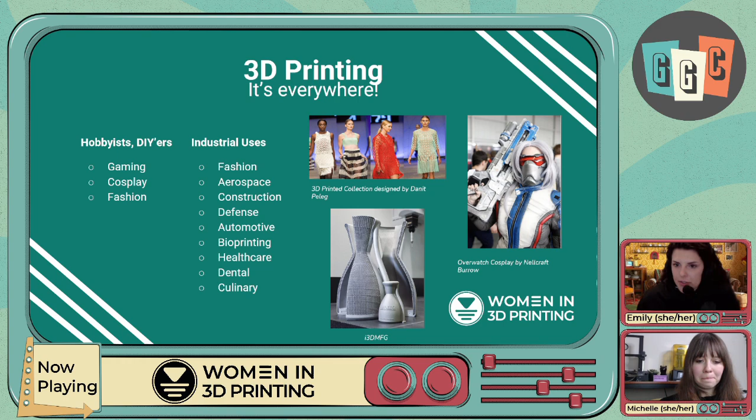On the slides here, I just have some cool pictures. On the far right, we have an Overwatch cosplay outfit that was 3D printed, the mask and the weapon, and then an example of some 3D printed fashion. And of course, the bottom picture is an example of some metallic additive 3D printing that we will get into a little bit later. Next slide, please.

I just wanted to do a brief introduction. If you want to learn more about 3D printing or see somebody local and how they implement and utilize it, check out Joel Telling with 3D Printing Nerd on YouTube. I highly suggest you follow him. He's a great resource to watch and see just what the technology is capable of.

If you want to play the video, I got a fun little snippet with Felicia Day after this commercial break.

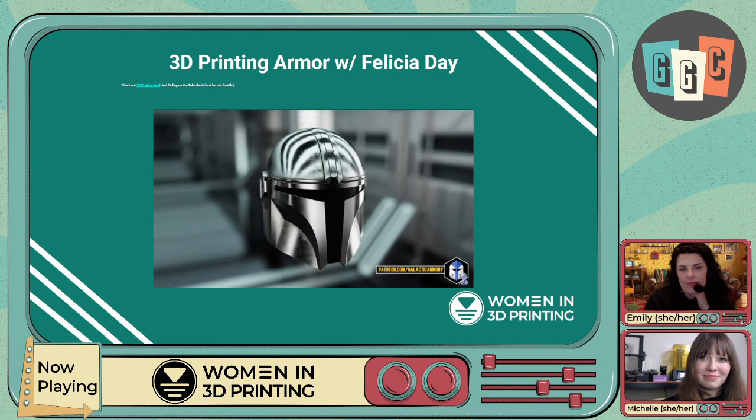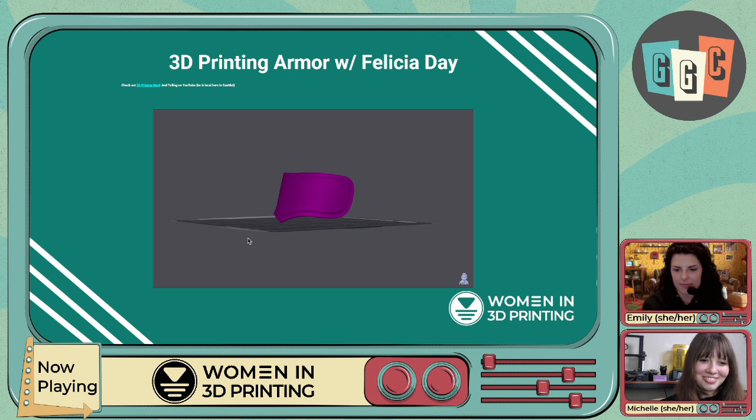And then we sent that off, there we go. Galactic Armory, who does incredible work, mostly Star Wars stuff. Oh, it's just breathtaking, their work is breathtaking. So I was so excited to have them on board here. With Galactic Armory on board, they took their time, took photos for scale, and created a set of armor for you. And sent it to me and said, here you go Joel, you can 3D print this. I'm very excited. Let me go get it.

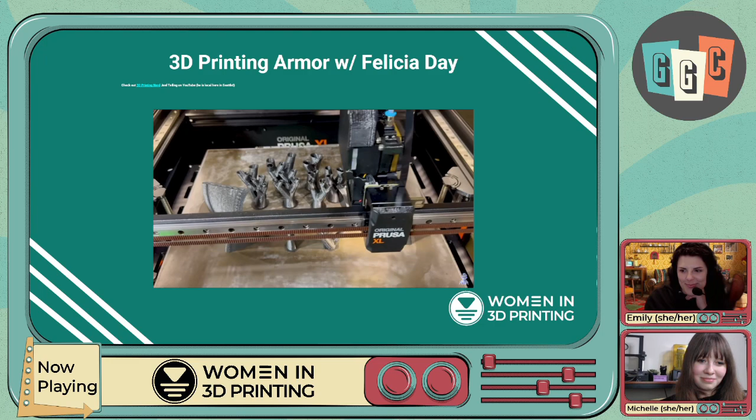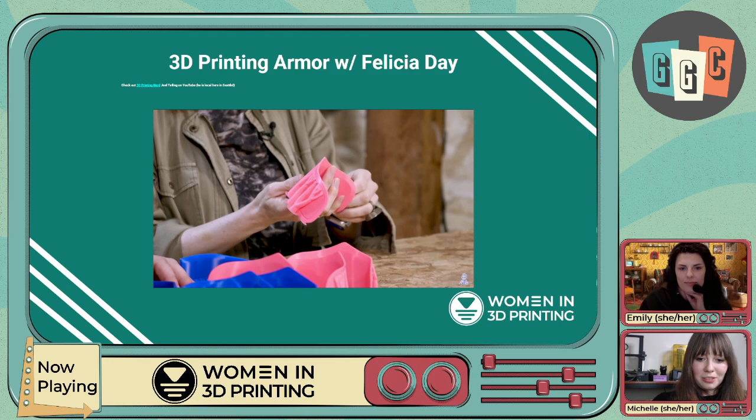This is so cool. Now why did you pick these filament colors? Because you wanted to get rid of them? Well, they were already loaded, and so I knew you were going to paint them. Okay, I could have made pink armor, but I also thought...

So you might have heard him talk a little bit about Galactic Armory. They do a lot with 3D printing. You can purchase fully developed and assembled cosplay weapons and helmets. They very much specialize in Star Wars cosplay props, as mentioned in the video. You can also buy their 3D printed files so that you can print the parts at home and assemble them yourself. They're very much in the Patreon startup state, so I highly suggest, if you're interested in purchasing a completed weapon or want to purchase the file and assemble it yourself for your next cool cosplay, they're a great resource for that. Next slide, please.

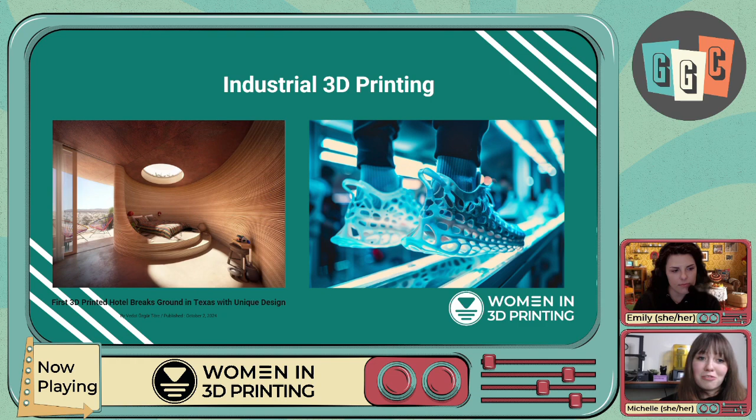These are just another couple examples of industrial 3D printing. There are so many use cases in additive manufacturing that it's difficult to cover them all. On top of these, we also have circuit board printing, but on the left you'll see a hotel, which is the first 3D printed hotel, just done down in Texas. It's very much material extrusion, similar to FDM printing that you may know, but on a very large industrial scale. And on the subject of fashion, the image on the right, 3D printing is also being used for orthopedics as well as shoe design, to create custom sizing for anyone that doesn't fit those average sizes. Next slide.

So you maybe have heard Michelle and I drop the term additive manufacturing, or maybe you've heard it thrown about in technical spaces. So what is additive manufacturing? It's really just a fancy technical term for 3D printing, usually used in a more industrial, professional setting. It's called AM for short because additive manufacturing is a bit of a mouthful. It distinguishes itself from traditional manufacturing, where you're subtracting material from a big brick to get your desired shape. Our goal in this section is to introduce you all to some additive manufacturing methods that you might not be familiar with, because they're not always accessible for the home user.

When we start to hit the industrial scale, the professional scale, we actually start to see metallic additive manufacturing, which is 3D printing parts that are metal, and we'll get into that more later. AM at the industrial scale has allowed the creation of ultra complex components that we simply wouldn't be able to achieve with traditional machining, which is why it's such an attractive industry. What do I mean by ultra complex components? With something like rocket engines, for example, designers are able to build more ideal internal structures, like flow channels and vanes, to make the rocket operate more optimally. These structures are hidden deep within the part, so you wouldn't be able to machine or cast them normally. That's why it's so exciting, and why we're starting to see so many advancements in rocket performance and things like that.

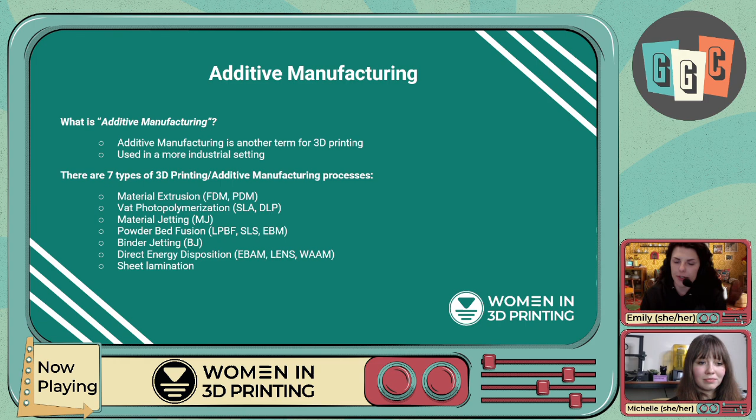There are 7 main types of additive manufacturing 3D printing. Michelle and I are going to touch on some of the most popular and our favorite ones: material extrusion, vat photopolymerization, material jetting, powder bed fusion, binder jetting, directed energy deposition, and sheet lamination. Sheet lamination is actually a composite process, the laying up of composite material layer upon layer. We won't be getting into that one tonight, but just for everyone's awareness, it is an AM process that's out there. Next slide, please.

Material extrusion is probably the one you recognize if you're familiar with 3D printing at all - you can see some of the machines behind me. The Ender 3 is a very standard, affordable FDM machine, which stands for Fused Deposition Modeling.

Additive manufacturing and 3D printing is very much an industry of alphabet soup, so you'll hear a lot of different acronyms thrown around - don't get too intimidated by them. A lot are only used in the industry, but there's FDM, and also PDM, which is pellet deposition modeling. The only real difference is that one uses filament and one uses pellets of polymers to melt down and build layer by layer.

If you do any cosplay 3D printing, this is very much the standard, most used process. There are two different types of filament you can use for a standard FDM printer: PLA and ABS, again adding to the alphabet soup. They're very long material names.

I won't necessarily go into those and confuse you more, but ultimately, if you decide to purchase an FDM 3D printer and you're trying to figure out which filament you should get - PLA is the most standard, it's more silky, has a better finish, and it's more environmentally friendly than ABS. ABS you would really just use if you want stronger material or mechanical properties, for something that's not going to be seen, and you want something more resistant to heat and fire.

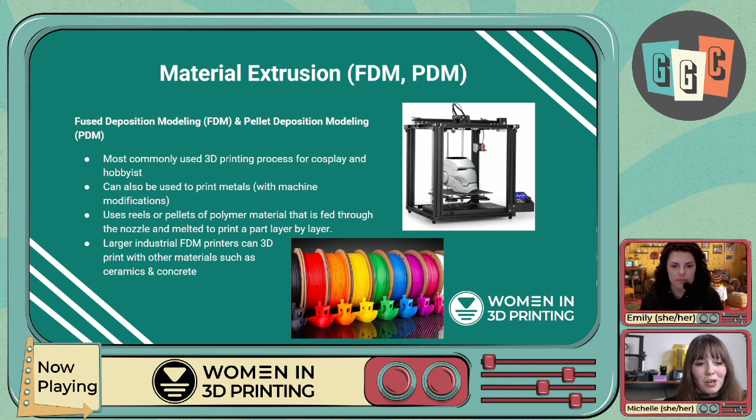The other polymer type is more commonly used if anybody has printed miniatures for tabletop gaming, such as Dungeons and Dragons or Warhammer. This is very much a standard - it's called SLA, stereolithography, another part of the alphabet soup, or digital light processing.

Essentially what that means is, unlike FDM where you start on a flat build plate and build up, the build plate will actually come down and soak into a bed of resin, and the UV light will cure it as it builds layer by layer, coming up as you see in the photo on the right. This one is very much known to have supports, so it has a lot of post-processing, meaning you have to remove all those supports, and you have to know upon building the CAD file where to put those supports. You can find a lot of those CAD files online.

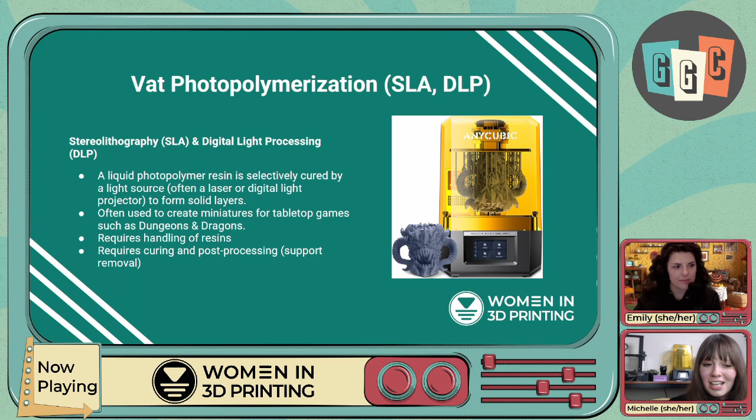And this is another process, one you won't see sold often for desktop 3D printers. This is more used in a more industrial setting, but it's used for very high quality prints with polymer. It can now be used for metal as well through new inventions called multi-jet printing and polyjet printing, and this one is great for doing multicolor printing.

So one of the restrictions with FDM and SLA, the stereolithography process and the fused deposition modeling process mentioned before, is that they don't really support multicolored printing. You have to stop the print and change out the filament to get multiple colors, or buy a filament that has that built in or is built to be multicolored.

So material jetting fixes that, because it can build strong materials and uses multicolor. The difference between this one and SLA and FDM is that it's very similar to the SLA with a resin bed, except instead it has a bed of powder or resin that cures as it does droplets layer by layer. So instead of building up, and you don't need supports for it, it just builds up layer by layer, similar to an FDM machine, but it does it drop by drop instead.

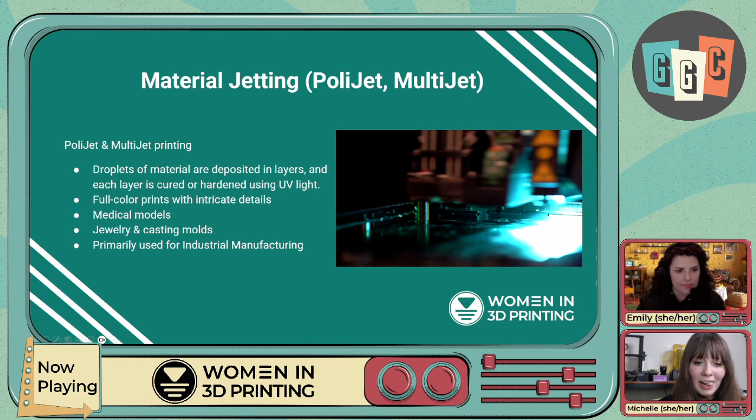Okay, so now we're moving on to the metallic side of things. This is super cool to me, one, because this is the kind of work I do, so obviously I'm a huge nerd about it. But also this is not necessarily accessible to the general consumer market, so I think it's really exciting for you guys to learn about it tonight.

So powder bed fusion is definitely one of the most popular metallic AM methods used in the industry because of the capability to achieve complex geometries, as mentioned earlier, and it actually achieves a pretty reasonable surface finish if you just need a rough net shape part. It's pretty heavily used in aerospace, automotive, general defense, and medical industries for implants and stuff like that.

And the way that it works is it lays down a layer of powder, which you can see it doing right now in that video on this side, on a build platform. It blasts it with a laser, and once it's done scanning the cross-sectional area of the part, similar to the way you print cross-sections for home 3D printing, it'll finish lasing, and then it will swipe powder back over after the building platform moves down.

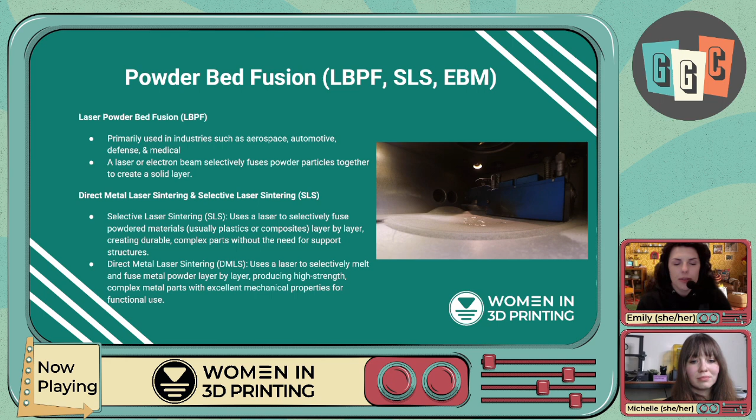Within this same category, there's also direct metal laser sintering and selective laser sintering. The main difference here is in sintering, the powder is subjected to heat and pressure, which causes the material to join together. So it's being heated up and kind of squeezed together within the pressurized chamber. But unlike laser powder bed fusion, the powder is not actually fully melting. In LPBF, it's fully melting and then re-solidifying.

So if you could go to the next slide, and then we'll play this video. This is from the Titans of CNC Machining. They do a lot of really cool manufacturing videos.

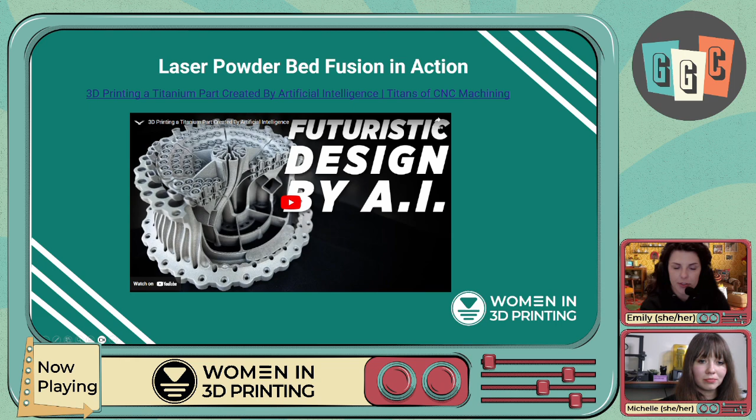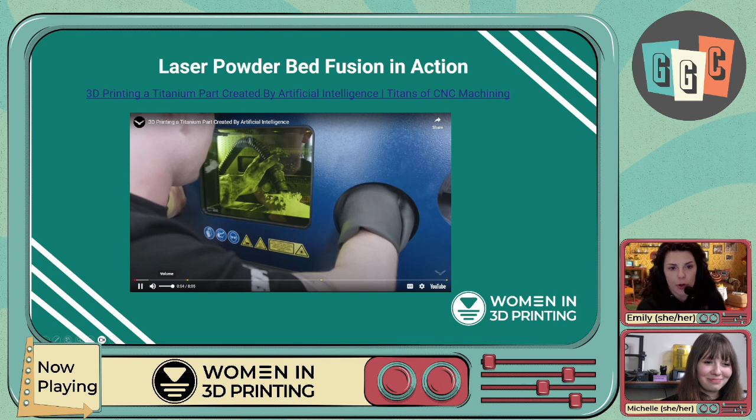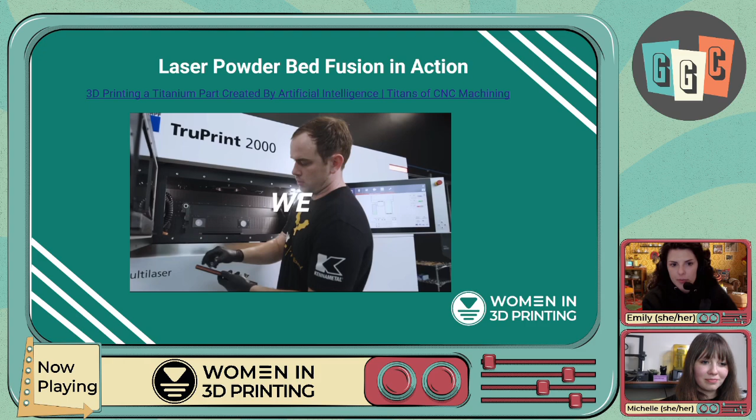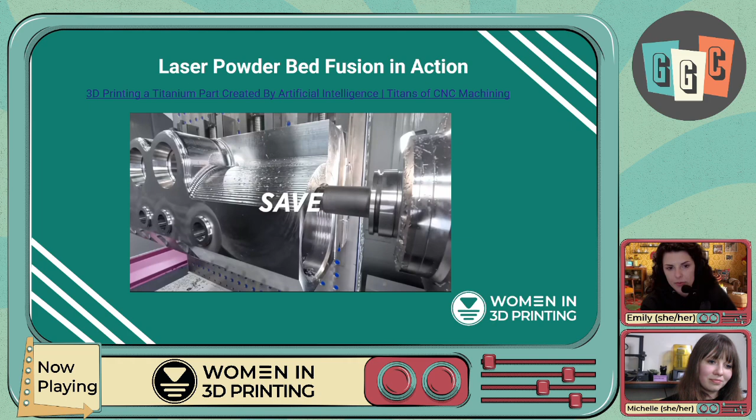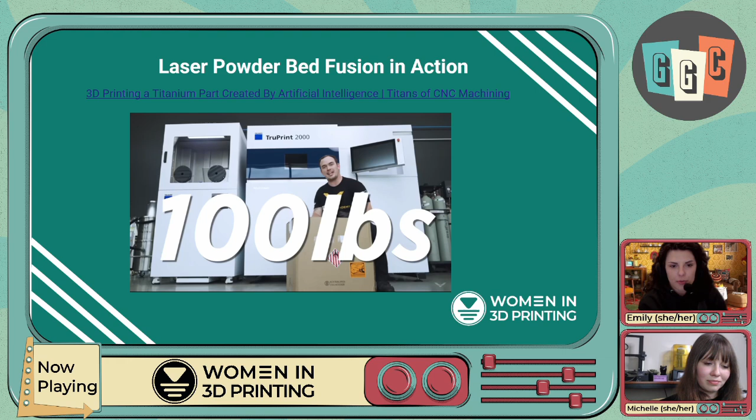We just kind of wanted to give you an idea of what this machine might look like, and kind of what general operation is. So if you could go to the next slide for me.

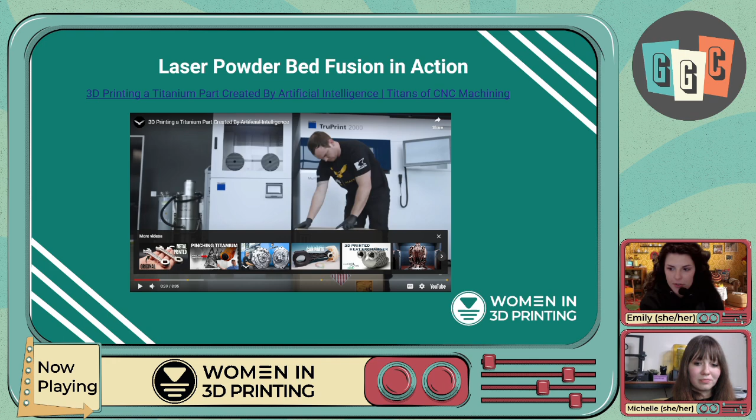We talked a little bit about careers, like if you wanted to start your own 3D cosplay business and get a business license, invest in larger scale machines, or even just get started with some of the smaller ones you see behind me, because that's possible with a lot of assembly, and people do it all the time. But there are other jobs available, especially if you're interested in industrial 3D printing or additive manufacturing. You don't necessarily have to be an engineer or get an engineering degree for it. There are actually a ton of training and education resources you can go through without even getting a degree, and I'll go over that later.

Design engineers is another one. There's a shortage of design engineers who can do design for additive manufacturing, which is essentially 3D CAD, building parts and making it so they can be transferred to the machines and printed in real time. So there's definitely a shortage there. Same with AM process engineers, which is similar to machine operators, but also looking more at the materials and the scientific side of it.